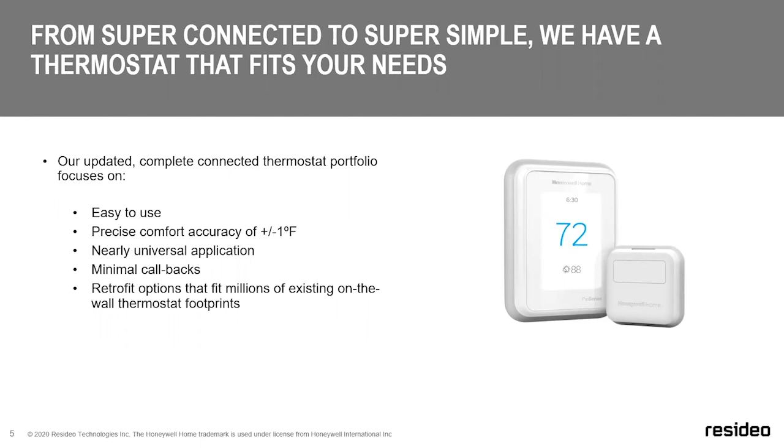We have a nearly universal application. We want to keep callbacks to a minimum, and also have the capability of upgrading millions of homes that already have a footprint out there and easily upgrade to a connected portfolio.

In order for you to truly understand what we're working at, there are two things you need to understand. It's the communication protocols, not only how the equipment communicates with itself and the different pieces put together, but also how the homeowner or customer interacts with their system outside of going directly to the thermostat face. And that's really done today in three different ways.

We have our proprietary RedLINK wireless technology, which I'll explain later. It's also done using Wi-Fi, which basically uses the existing internet signal throughout the house to open that protocol up and allow you to interact with your system without going directly to the thermostat. And the final way is through Z-Wave, now upgraded to Z-Wave Plus, which allows you to integrate other systems in the house together through a hub, and I'll go through it a little bit as we come up. So those are the three main ways.

So what is a communication protocol? Basically, it's two parts. From the equipment perspective, it's how the different items in the HVAC system talk to each other, whether it's the outdoor unit and the condenser to the air handler to the thermostat. That's done in a bunch of different ways, whether through wires or wireless communication. The takeaway is that the biggest difference is how the format and frequency is transmitted. So that's the first part. And here's a little breakdown of how that looks.

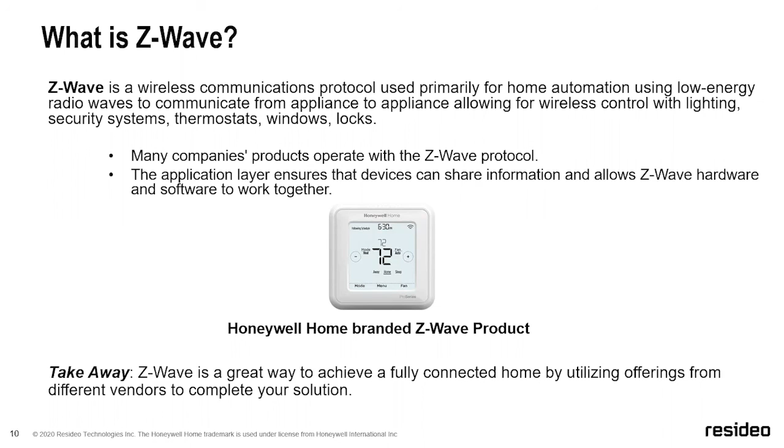Moving on, we're going to talk about Wi-Fi. Now here's where things get a little confusing from the most part that we see out there. Really what it is, the Wi-Fi uses the Wi-Fi signal within the house, which most homes have a Wi-Fi router these days.

It will communicate back to that. Then the apps translate the language so that the internet understands it, and then you can use your phone to make the temperature go up and down or control however you want to. It's a very inexpensive way to start automating a home where there's not much infrastructure needed other than that router, and then you can add other things in.

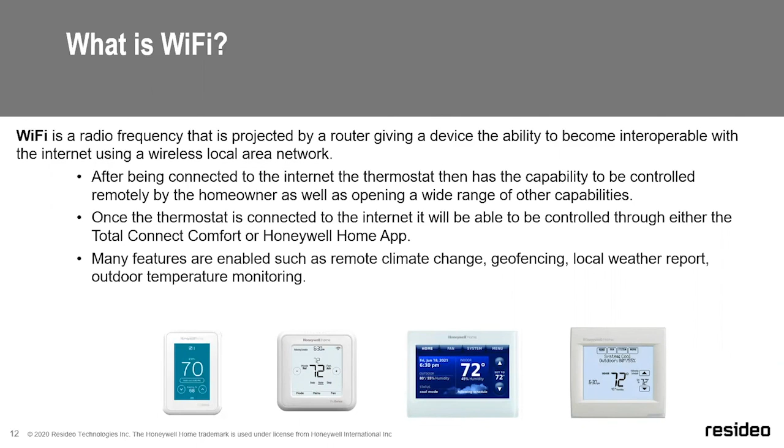What's really nice about the Honeywell Home app and the Total Connect Comfort is we set it up with an open protocol that allows us to work with whatever internet or home automation system that you choose. If today you have one type of phone, it doesn't matter that in 3 years you may decide to have a different brand or something else - we allow it to open and actually talk in there. It also allows you to do that in an inexpensive way. There's not a lot of invasive ways. Use your current system.

Another nice thing also is, before I start getting into the individual smart or Wi-Fi enabled thermostats that we have in our portfolio, is what's unique to Honeywell is we have what we call the K terminal on all of the thermostats that I'll talk about, and that allows us to provide power to the thermostats without using power stealing, which is a best practice, so to speak.

So if you go into a house that wants to upgrade to a Wi-Fi thermostat and you only have 4 wires in the wall, the C-wire adapter is a great option for all these thermostats to basically take your Y and G wire and split the signal across K, and that goes right into the back of the thermostat. The C-wire adapter, which is a THP9045A1098, is relatively inexpensive, and it's very fast. You do all the wiring down to the equipment, and you're set to go.

And why it's a best practice is because the way power stealing thermostats work is that they charge a battery in the thermostat when the system is not running. If you get into situations of long cold periods or long hot periods and the system runs more, the battery does not get properly charged, and then you may have problems with your customers down the road where they're hot or where the system has failed because the battery has gone dead.

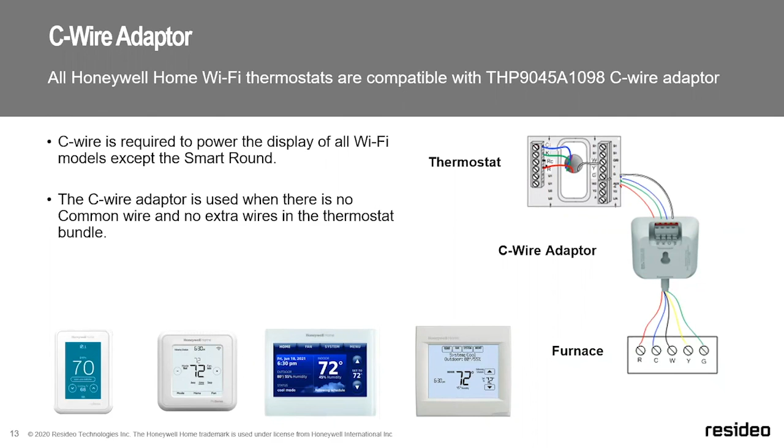So the reason why these thermostats need power is because that communication with a Wi-Fi signal is constant, and therefore there's a lot of communication back and forth. So it's constantly looking for it, and that does draw power.

So we started our portfolio here off with the T6 Pro Smart Series. We have 2 models. We have the TH6320WF2003, that allows you up to 3 heats, 2 cools. It's dual fuel enabled, has a ventilation control, and yet again it is a C-wire. It also comes with a 5-year warranty. And then we have the 6220, which is a 2-heat, 1-cool heat pump, or 2-heat, 2-cool conventional.

Really what we do is, the reason there's 2 thermostats in this space is that we've given you the opportunity at a price point that the rest of the market really doesn't support, at a lower price basically giving you the capability of adding Wi-Fi to a much more basic structure and being more cost effective rather than having to go with a super expensive type thermostat.

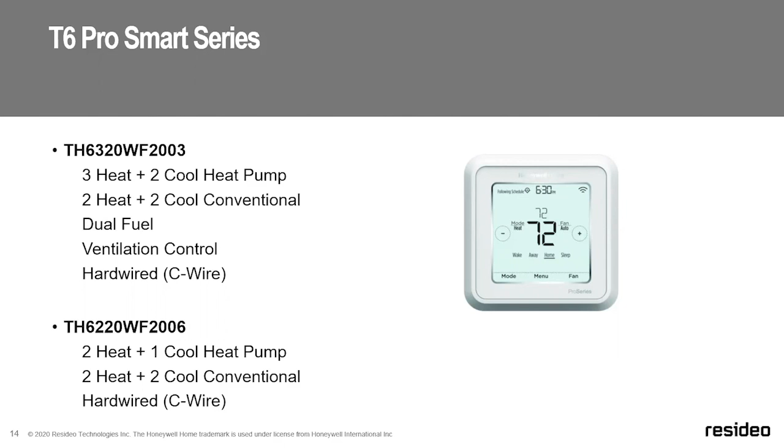This is really good for if you're a contractor that likes to use bundles in their sales process. This is a very easy way to give that customer that next level at a very price effective way, and they're full of plenty of features.

So what accessories does it come with? There's also ones that come in the box. In the box you get the J-Box adapter, the universal wall plate, all the things you need to do the job. Then there's some extra accessories listed on the screen - we have a larger decorative wall plate, as you can see on the top. You can use indoor sensors and outdoor sensors, and then also there's the C-wire adapter that we talked about earlier.

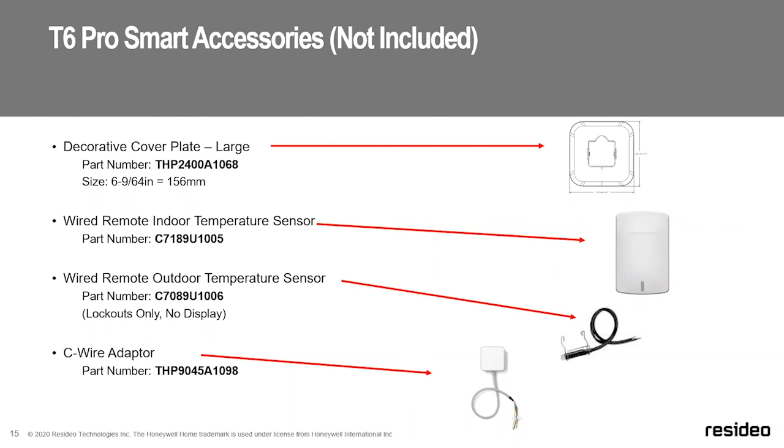Okay, just some other features I want to go over on the 6320. You have the ability to have a balance point for low outdoor temp. You can lock out auxiliary heat. There's a ventilation option for outdoor temperature. All these things you're going to need the outdoor sensor for.

Or the use of AccuWeather as internet weather in order to set those points, which is really convenient. And also, yet again, a lot of situations where you don't have that capability to run that outdoor wire, we can use the internet to provide that.

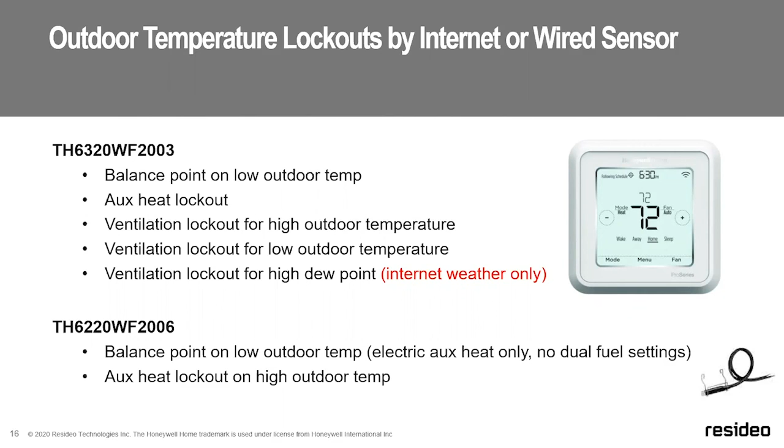The 6220, for where it is, does not do dual fuel, but does have electric auxiliary heat, and we can lock out on high temperature.

There are alerts and reminders. This is going to come up a couple times in our conversation today, but keep in mind that we have lots of alerts and customizable reminders throughout our thermostat portfolio. Here are some of the ones that the T6 has: clear the humidifier tank, replace pads, filters, ventilator core, all the different things you would need to do, and that's set up through the app and on the thermostat face itself.

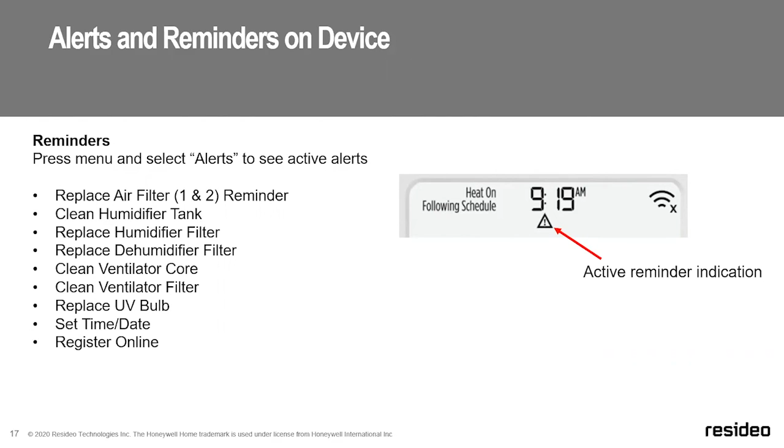They can set all those to it. It's really nice. Set up date and time, but if it's connected to Wi-Fi, you won't need to do all that. You can also register the thermostat directly from the wall.

The next of ours, and this is one of my favorite thermostats out there, is the VisionPRO 8000 Smart, the TH8321 WF1001. This is really like a workhorse thermostat in our portfolio, in the fact that it is both residential and light commercial control. You have a lot of flexibility here, 3 heats, 2 cools. It's dual fuel enabled, has a 5-year warranty, and also comes with a set of IAQ terminals.

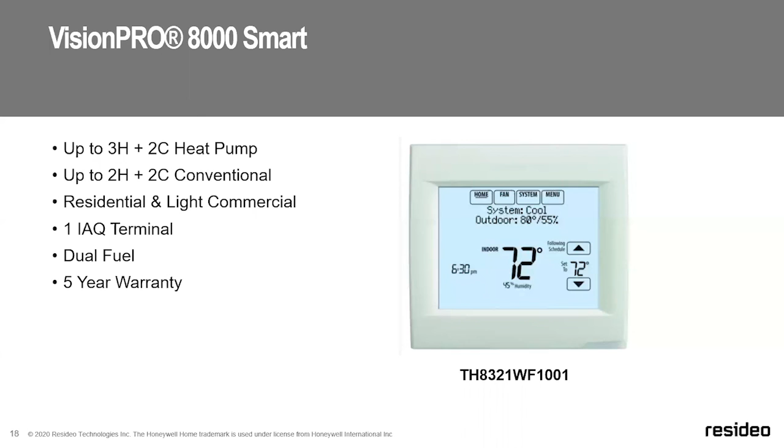And then we can take care of that there. In the light commercial size, it has the capability of handling economizers and others like that, and you can also set it up for occupied, unoccupied.

I just want to show you here, the special part is the sensor input, the S1s that are automatically in the back and the wiring. You can set those S1s to either be an indoor sensor, which is a C7189U. Just keep in mind that Ohm's law applies in this scenario on the wiring, so make sure you get that correct, where you just can't run them all in there. You can actually have up to 4 in this sense, and then they'll do an averaging.

You can also use the TR21A 20K averaging indoor sensors, which is also applicable here as well. And if you wanted to run for a dual fuel scenario, run the outdoor C7089U 1006. You can run that out there and have direct temperature set point for the outside.

What's really nice about the AccuWeather option for all of the thermostats I'm going to talk about today is, for the most part, the way it works is it finds the 2 closest municipal buildings to the location of the thermostat, and then runs the averages off of those. It's the same technology that's in your phone if you were to look up the weather today and find out what's going on where you are. Again, getting an outdoor sensor to the north side of the building and in the shade can be very complicated. This gives you another avenue.

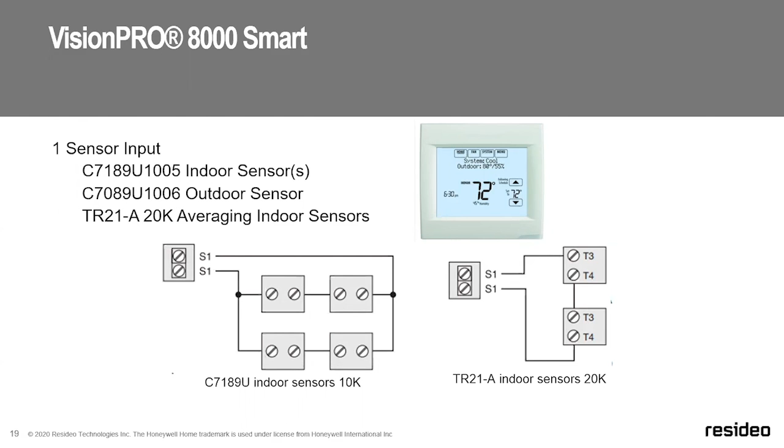You can set custom reminders on all different types here, and you can also put advertisements in as well, like saying, call us for a fall tune-up special, or something to that effect, for service reminders. This is also a really good thermostat in the fact that it has a lockout type setup.

You can do either a full lockout, where you can lock out the thermostat altogether, where no one has access to it other than the person that holds the code. Or you can do a semi-lockout, which is kind of like the morphine drip at the hospital - you can hit the button as many times as you want, but whoever has set it for the max number of degrees up and down, it'll do that.

From personal use, I've used this a lot in those types of situations, particularly a school system that had a lot of mobile trailers. This allowed them to do that and actually keep their energy costs under control. That's a really nice feature. You also don't need that sign out there that says please don't touch our thermostat, which is also nice, and not needing the plastic cover. We do have the plastic cover available for a lockbox, but know that you can lock the screen and not have that.

Looking here, automatic software updates through the Wi-Fi signal.

So if we make a change to how we want it to operate, or there's a change to the ASHRAE code, it'll automatically upgrade itself and save you time and money. Just keep in mind on this one, we got to have 24 volts, so we can use that C-wire adapter here as well. And there are no batteries on this one, so we got to keep it constantly powered. We'll talk about the RedLINK version of this later, but just keep that in mind.

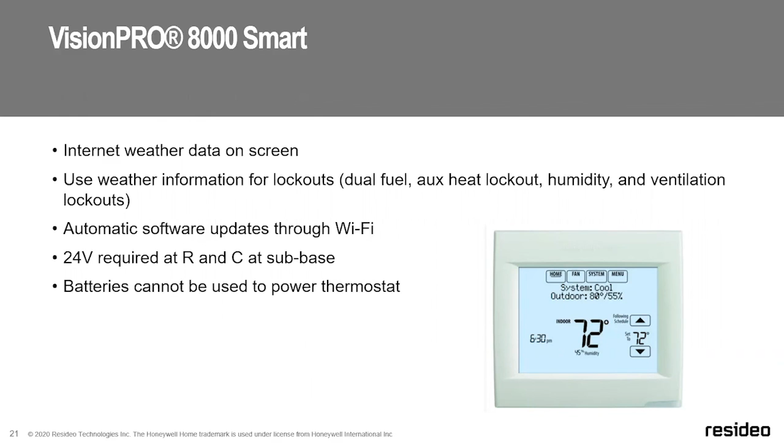Another popular option here is the Wi-Fi 9000 Smart. It's a 3 heat 2 cool, 7-day programmable, and has customizable color with 14 different color types. Really nice to match what's going on the wall. It looks really, really sharp.

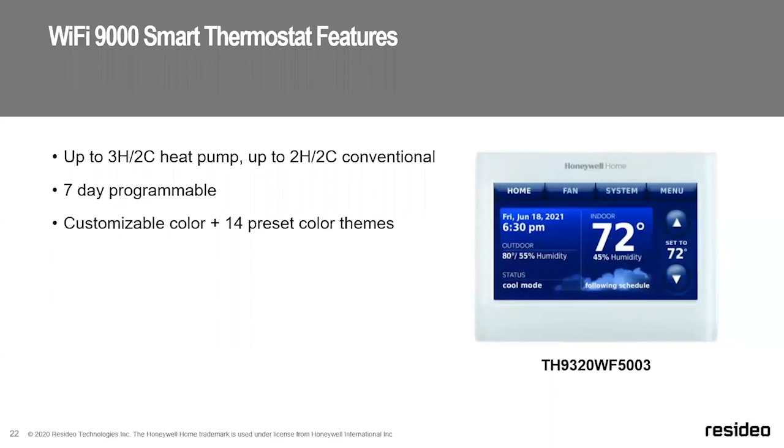There's another part to this thermostat that is really nice. This is something I would like you to reach out to your Resideo CDSs or RDRs about, but it has remote access through Androids and apps and all that stuff you can see there for scheduling and similar features. We also have a number of energy partners that use this 9000 for their logic as far as getting the best operation for energy savings.

So you have that multiple location customer, like sports bars or similar, where there are multiple locations and they can use the energy savings. We have a number of partners that can help us do that. It's also internet synchronized clock and all that data. It's pretty much a set it and forget it type thermostat, and it looks very sharp on the wall.

We're going to move into our communication protocol, which is the RedLink wireless technology or protocol, and we're going to roll through the thermostats that work on this.

It's important to know that every thermostat we just talked about from the smart perspective or Wi-Fi requires wires to communicate within the HVAC equipment. So you need to have running wires leaving the thermostat, going down to the air handler, out to the outdoor unit or rooftop or whatever else you've got going on there. You need wires to run to all the sensors, and that's all great when you're building new or have the wires in the wall.

But we also know that as systems get upgraded and the movement to heat pumps, which has become super popular, and configurations change, the cost of running wires can be excessive. But the smart ones are very good for using basically just basic Wi-Fi.

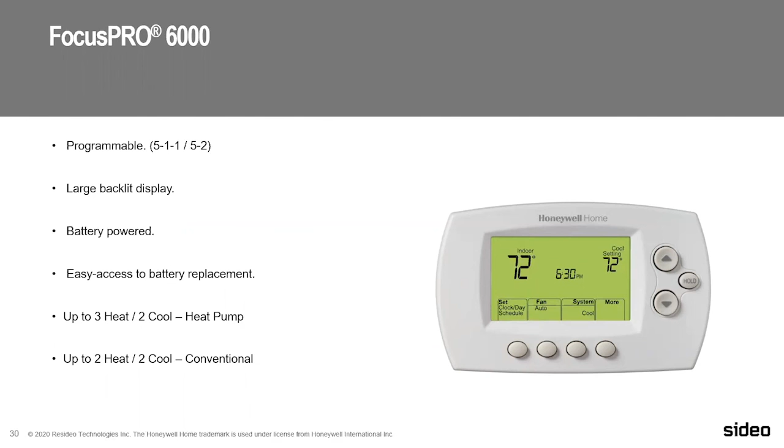Then we also have the Focus Pro 6000. That's programmable, a 511 or 52 large display, just like you saw before, battery powered. It's easy to do, 3 heat 2 cool, and 2 heat 2 cool conventional. We have multiple kits for this as well. In the case of dual fuel, you have access to the outdoor sensor. We have multiple kits that include both the outdoor sensor and the gateway, just the gateway, or just the kit altogether, so there's one component to that and you're done.

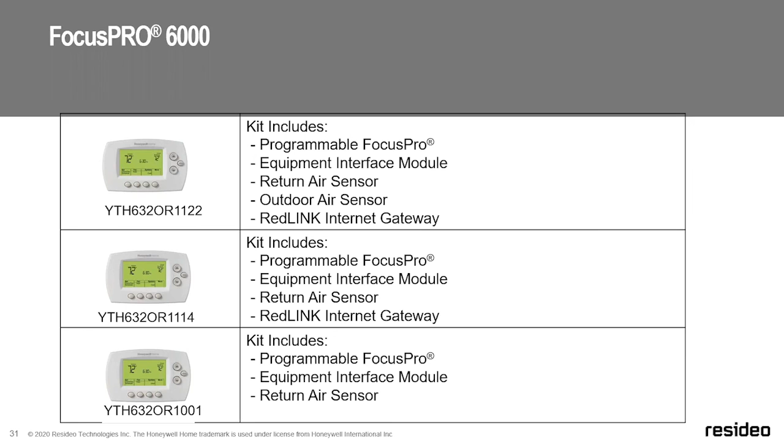All right, back to the VisionPRO 8000 with RedLink. The part number on that is a TH8321R1001. It's important to note in the nomenclature that if there's an R in the middle of the part number, that means it's RedLink and then it is compatible.

Don't confuse it with the 8000 Smart, which looks identical to it. A lot of the capabilities are the same. Just know that with that one you need to fully wire the system. In this case, you will not need to.

We have multiple variances of it. The 8321 has an indoor air quality component to it, and then you can also choose it in 8320. The 0 in the 8320 means there is no IAQ control. And then we also have a simple 1 heat, 1 cool model, for real basic stuff when you just need that and batteries.

What's really cool about this thermostat is if you add the THM5421R equipment interface module, it explodes in capability, both on the commercial side and residential side, giving you up to 4 heats. You can actually go to 4 heats, 4 cools with this scenario, which you may not need every day, but it's really nice that you're able to do that.

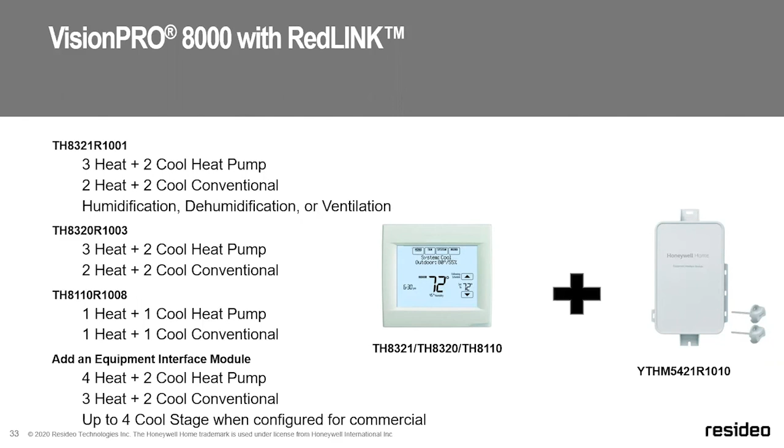It's easy to set up. It's all in plain English when you're doing a setup, so a contractor or whoever's doing the work can work through it. You won't need that little install manual because everything's explained there. If you need help, what's really nice is there's a help button—you just hit that and it explains everything on the page that you would need to do.

It also has the capability of being upgraded, or if you've got a large project with multiple 8000s, you can put the information needed for setup on one MicroSD card and then upload all of them. So say you're doing a 20-thermostat job, you can set it up once and just roll through. It also allows you to put in your dealer information, and it just makes setup easy and reduces setup errors.

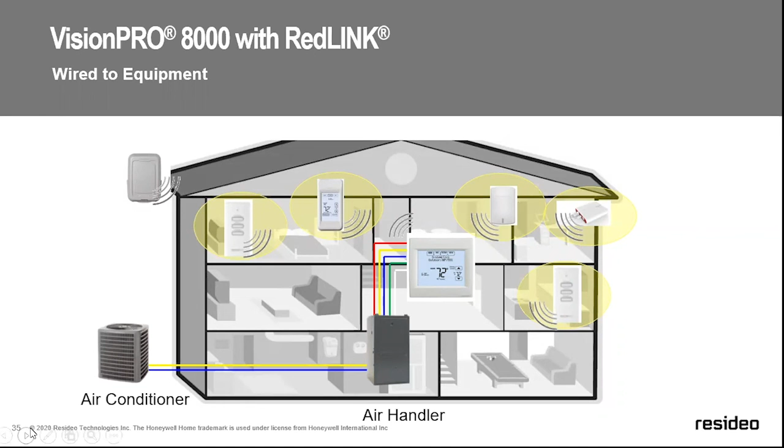Know that in this scenario you can use up to 5 of those sensors and do averaging on humidity and temperature. If you remove the thermostat face, you can actually have a 6th. A really good situation for that is, say someone has an office—you can locate that sensor in an office and take care of the space out there that they're looking for without giving access to the thermostat.

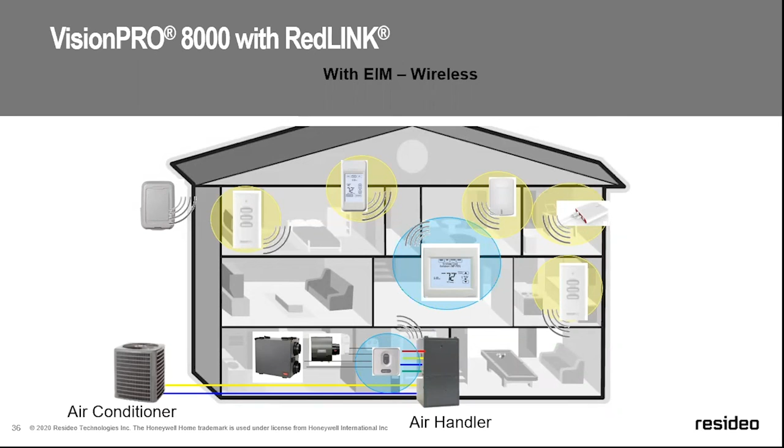And then also know that in case we can do this wirelessly, if you want to relocate a thermostat and you have the EIM, which gives you the over the 6000 and 5000 we talked about earlier, gives you the capability of controlling a number of IAQ devices, whether they're humidifiers, dehumidifiers, or ventilation. And then we also have a newer one called the ERM. It's not pictured here, but it's good to know that if you're upgrading outside from an AC unit to a heat pump, which is very common in my part of the world, we have an equipment remote module which allows you to do that, supplies power out there.

So really nice setup. The 8000 has a lot of capability.

Okay, and then here we go into zoning. All of our RedLink thermostats we're going to talk about today can work with our zoning system. There's another class that we have out there, take a look at it online and also attend a later webinar on it. It allows you to basically use zoning the same way using RedLink, so you can cut down on all that wiring.

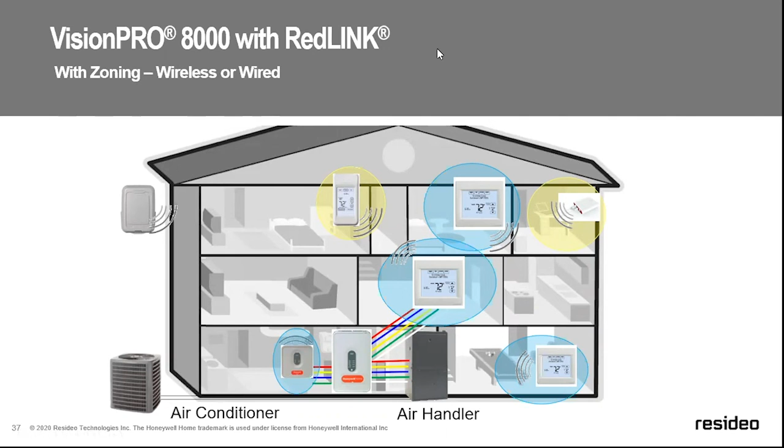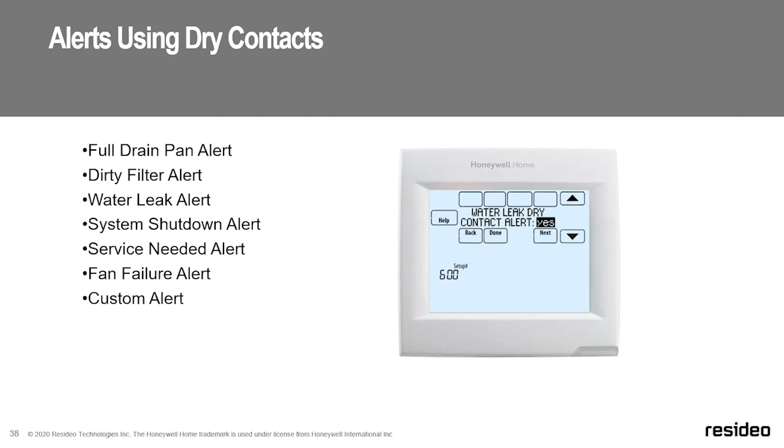I just want to go real quick over the universal outputs. When you're just using the 8000 all by itself, you have one, and then you have to choose between what you want to wire to it, whether it's humidification, ventilation, or a stage 3 cooling, and then backup for radiant heat.

Now if you add the EIM, equipment interface module that we were talking about earlier, you can have everything you want. You can add humidification, dehumidification, and ventilation, the additional cooling stages, and geothermal heat. So just keep in mind, figure out what your system requirements are, and then you can upgrade very easily here.

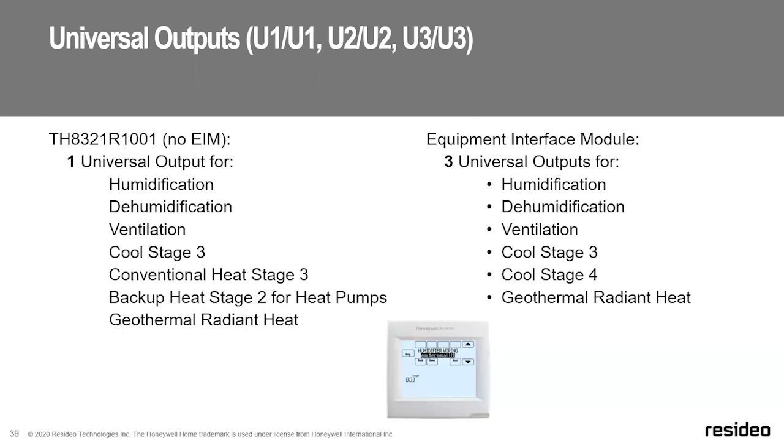Okay, just a little quick information on the MicroSD card, how you do it. Basically you can set everything up from the computer. If you go to the Forward Thinking site there, you can actually set up and go through the screens, do all the setup, and then plug in the MicroSD card and transfer it over. You can also add your information as well.

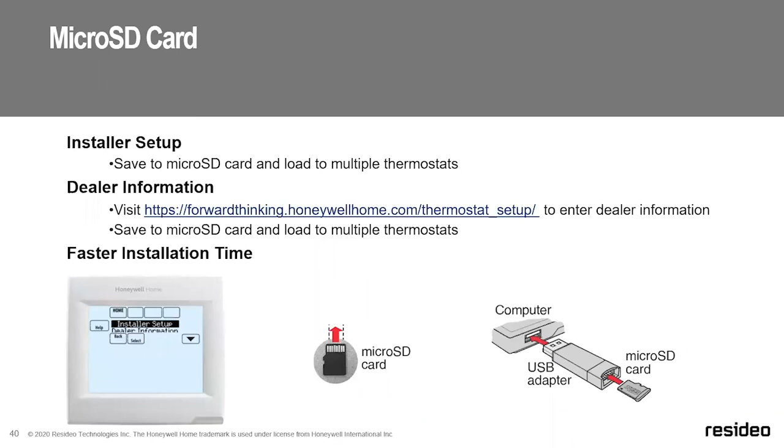All right, more custom reminders, the same ones as before in the Smart, in the 8000 Smart.

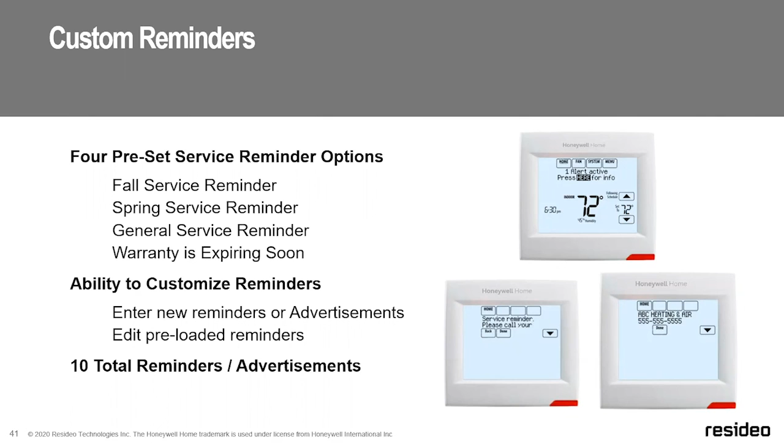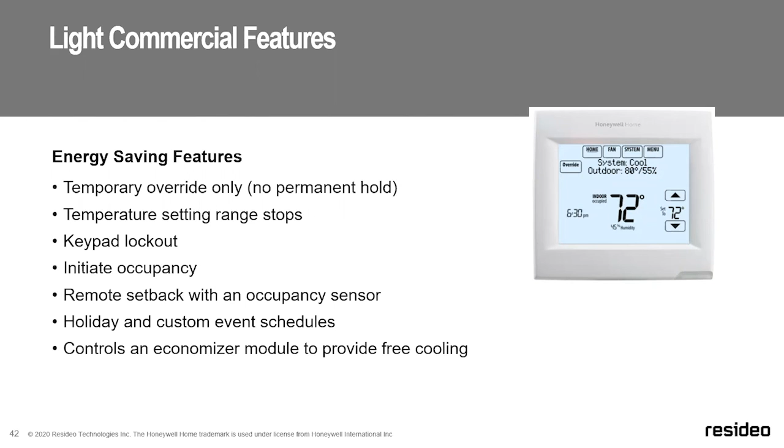Moving on, this is our newest thermostat in the portfolio, the T10 Pro with Smart RedLink thermostat. This is kind of a hybrid, it's our first one that we would consider to be dual band. And what do I mean by that? This is a case where it can do Wi-Fi, adding Wi-Fi to the system without needing a RIB. The technology is getting to the point where we can shrink it down and not need the extra accessory. But this has a lot of extra features that I'll get to in a minute, that really make this thermostat a problem solver for a lot of our customers out there.

So it's the THX321WFS2001W. Comes in the kit is the thermostat, one sensor, which I'll explain how that sensor works, the UWP that you got used to with the T series, and a J-Box adapter. It's available without the sensor if you want to a la carte that to your customers. And then the sensors, the RedLink 3.0 indoor sensors, which have a lot more capability over our older 2.0, come in packs of 2.

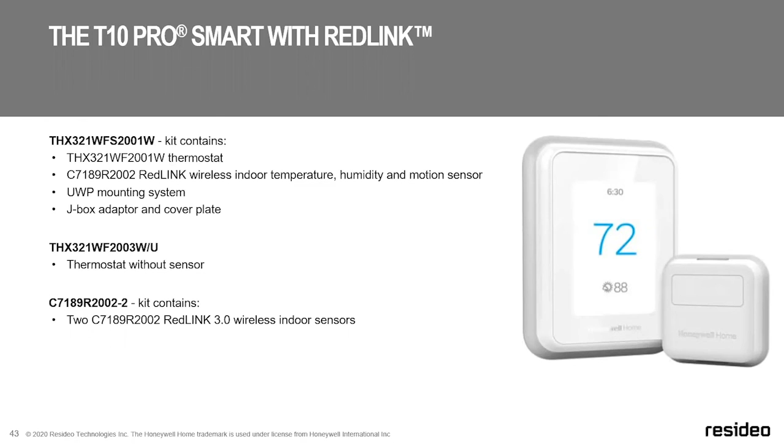So here's its capability. It's 3 heat, 2 cool heat pump, 2 heat, 2 cool conventional. Has dual fuel capability, auxiliary heat lockout, and then you have one indoor air quality terminal that you can use for humidification, dehumidification, or ventilation. And then here's an extra thing, little bonus to it. If you choose humidification or ventilation as one of your options, we give you a half option, as I like to call it, which allows you to dehumidify using the system. So the algorithm is in there to do that, where we can overcool, and I'll explain it a little bit here, but it gives you a lot more flexibility at a very, very competitive price.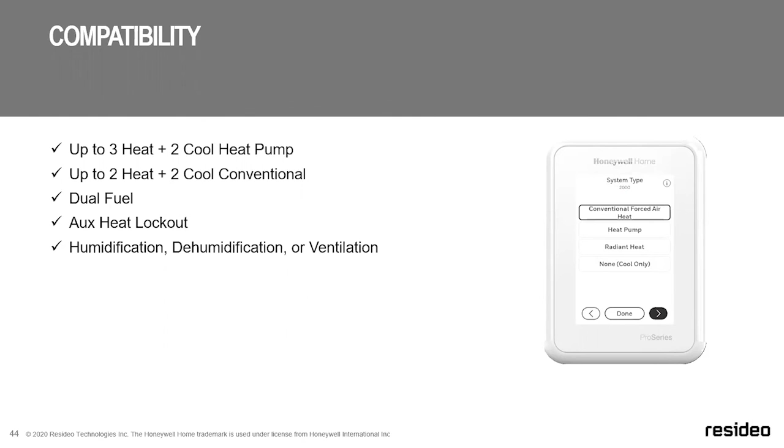This one does need to be wired, so we talked about it's kind of like a hybrid between RedLink and Smart, in the fact that you do need to run the wires down to the equipment. It's just that the RedLink 3.0 sensors are the wireless portion, but it has the K terminal as before, and you can use the C-wire adapter.

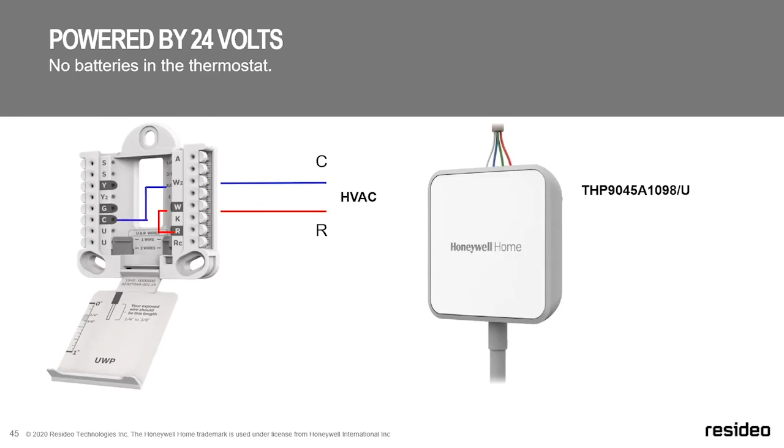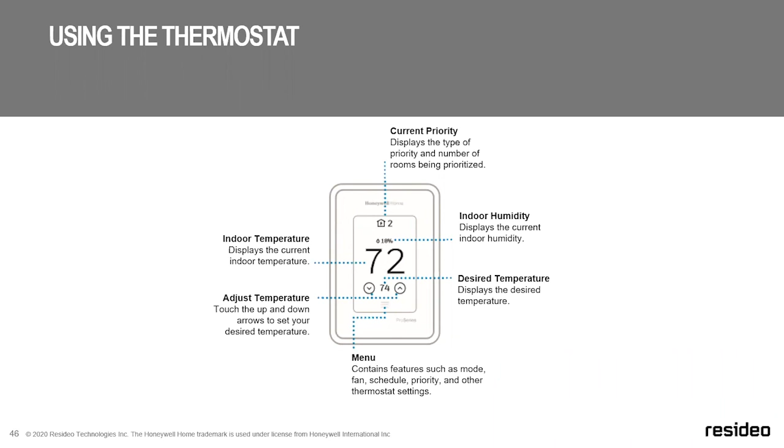Okay, using the thermostat is about as easy as possible. It is set up to be like your smartphone. It looks and holds the same way, and the way you interact with it is the same. And there's a lot of information up there that the customer can take a look at, and we'll look at some screenshots here in a moment. But you see a desired temperature, everything here. And when you look at this screen, it's going to look exactly as it does on that app.

Setup is simple as can be. Walk through the steps. It's all written there. If there's ever a part where you do not understand the question, you can just hit the little i icon up there in the top right corner, and bang, everything you need to know is right there to answer your question. What's also nice is it flows back and forth as you need to do stuff, so that you don't have to start with ISU 1 and work all the way through if something didn't go right, or you found out you needed to go back. You can go directly to that.

So it's very interactive. It also gives you the capability where it locks out questions once you answer them. So your setup time is reduced dramatically because, okay, you said it's going to be a heat pump. You're not going to be bothering with any of the other questions that do not apply.

Okay, now here's the best part of this: the RedLink 3.0 sensors. The other RedLink devices we're talking about are 2.0. As we're upgrading our system, 3.0 is the newest version, the latest and greatest of RedLink, and we're going to be adding accessories moving forward. So this gives you capability, but these sensors are really nice in the fact that they take temperature, humidity, and motion or occupancy, and then we can average temperatures throughout or place priority.

This is really where we get into the fact that we, for years, have always reacted to our houses instead of our houses reacting to us. This gives you that capability now and actually helps you and your customers, particularly the ones that have always had a room that they kind of live with, whether it's too hot or too cold, and you didn't really have another way, and zoning is just not feasible in that scenario. That's a very invasive process. This is kind of like having a thermostat in your pocket as you walk around. It's pretty nice.

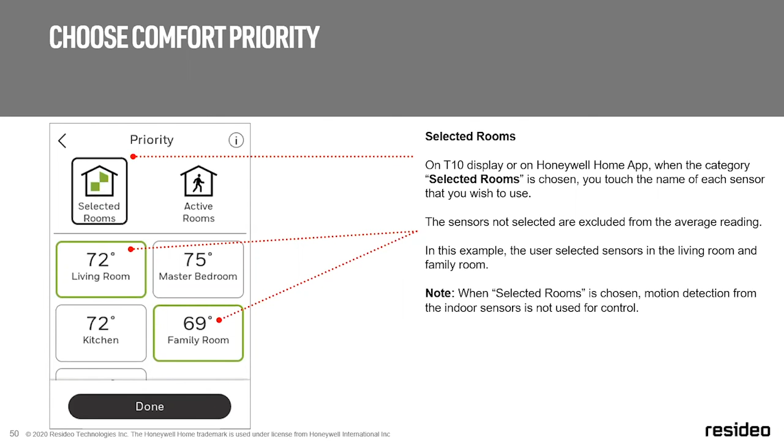What you'll see is when you first put this thermostat in, you're going to see variances in temperatures throughout the house. And it's amazing to watch over 30 days as the thermostat learns, and as it does this averaging, how much tighter those get throughout the house. And the next way is what we call active rooms or priority, using that motion sensor that we talked about. Did you see that there's a little green guy there on the screen?

Basically how it works is when a room is occupied longer than 5 minutes by someone who's more than 80 pounds, that's an important distinction. If you got a little one running around below 80 pounds, you're not messing with the system at all. Or if you have a large animal or dog going around, it's all based on that.

If you occupy for longer than 5 minutes, it becomes an active room and stays active until someone has left it for longer than 5 minutes. Pretty nifty. Like I said, you interact, but it won't cause other problems because you may be bouncing in or out of the room, or you had a little one that's running through every room all the time.

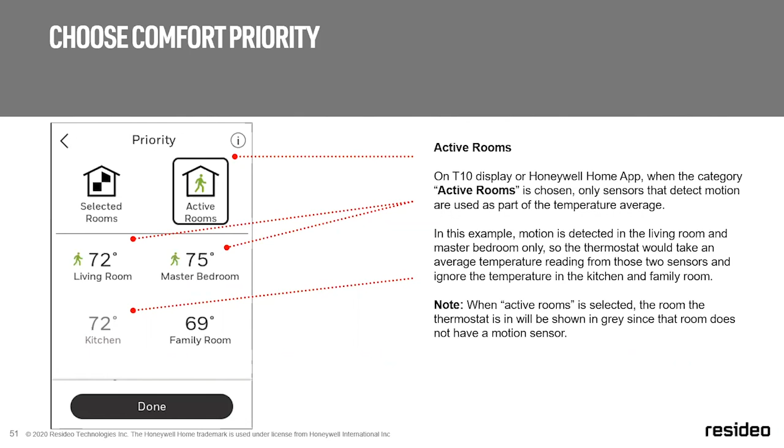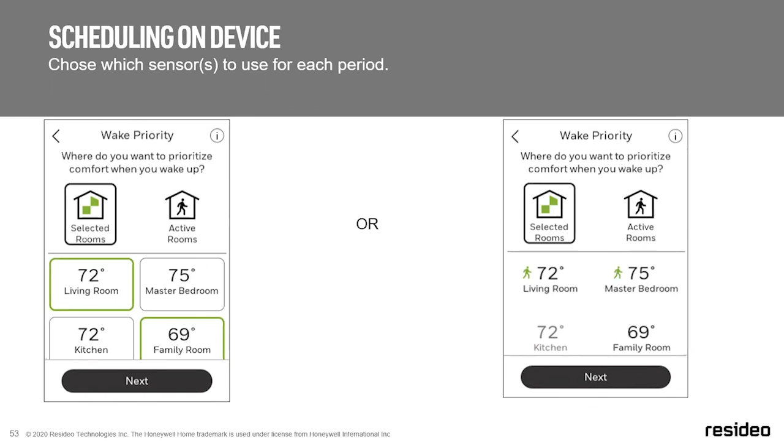Scheduling on this device is very simple. It's based on however the customer wants to interact with their thermostat, whether it is using the geofencing option or time-based or manually doing it. There's plenty there. Wake priority, you can set all that kind of stuff as well. If you want to wake at a different temperature than when you go to bed, you have all that flexibility.

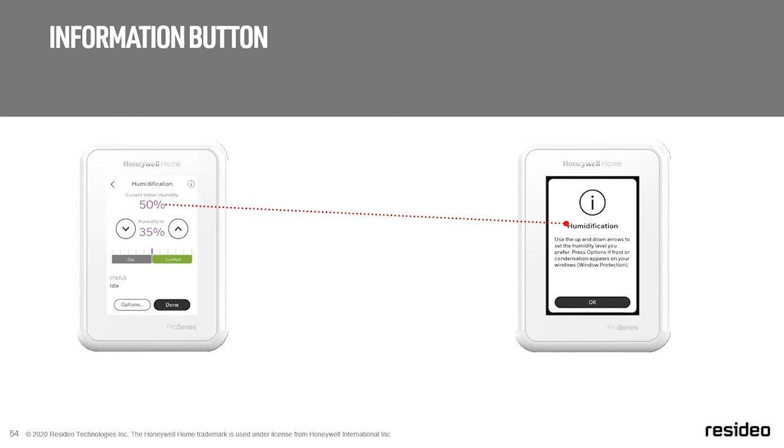The information button, I was talking about that earlier. If anyone is stuck at any point, hit that button and it gives you the full explanation of what it is. Okay. How does it look? So here's some things, just to give you an idea.

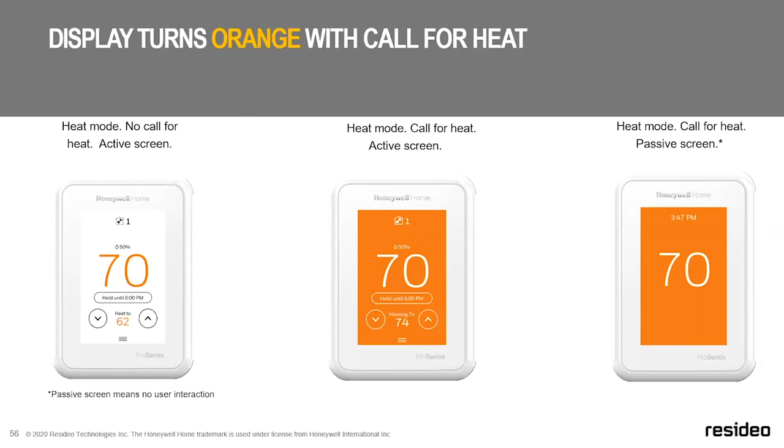And when it's idle, just the numbers are color coded. And then if it's active, the full screen changes color. Same for heat, but it'll be orange in that aspect. Okay, customize an interactive display.

All right, and again, you can set this thermostat to be any brightness that you want, and depending on the room that it's in, you can change the backlight as much as you want, and also set it time-based, where you say, all right, after 9 o'clock, it's in my bedroom, I don't want to see that light. It'll shut off until somebody wakes it up by actively touching it.

And this is a really nice feature here. We have a private label program that I'll talk about in a little bit, but here you can put your dealer information in, type it in, or put in your Pro Perks number. And when you put in your Pro Perks, it'll automatically populate. And this way, when the alert comes up, it'll say, call Dan's Plumber, and here's the information to do that. It's really great for repeat business.

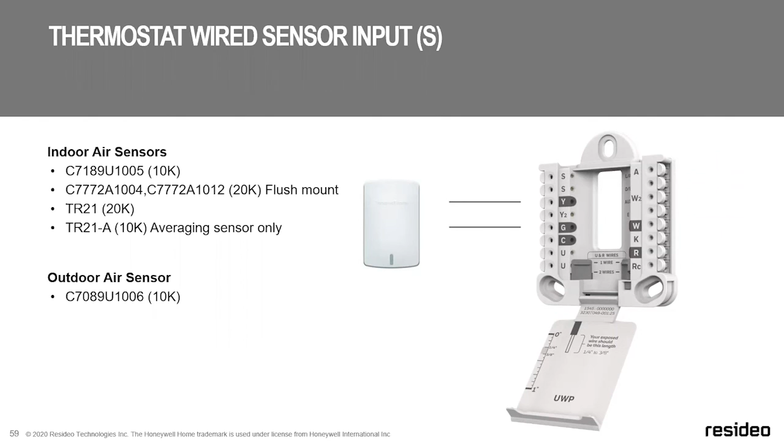The thermostat has a wired sensor input. We just talked about the indoor sensors, which, by the way, you can add up to 20 of them, and you have a range of 200 feet, which is pretty nice. But you can run the wired sensors if you want. Just keep in mind, if you do that, Ohm's law will apply. Really, this is a good spot for the outdoor sensor, depending on where you are in the country, if you want to run an outdoor sensor as opposed to using AccuWeather. And again, there's the options there.

Okay, humidifier control. This is one that's really dear to my heart, believe it or not. In the past, when you're setting up frost protection or your humidification or your indoor air quality things, it was all kind of general. Here it's very specific, and there's different ways to operate different types of humidifiers, whether bypass or evaporative or steam type. They'll run a little bit differently to get the optimal out of it.

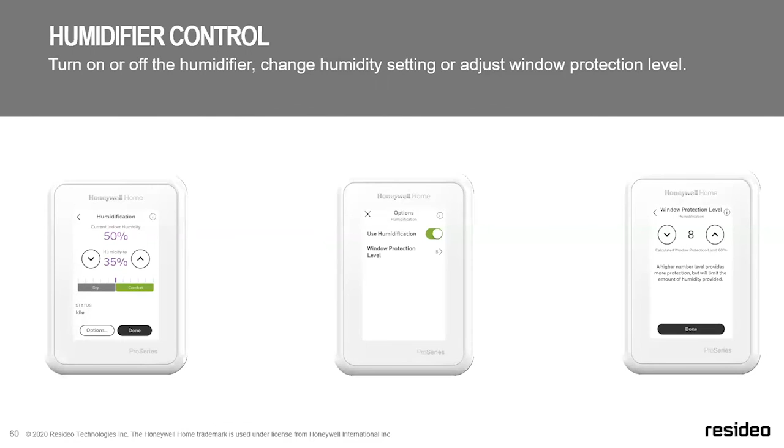Here's very simple. You just tell it what type it is, and if you want to do window protection, the old way was you went to the book, you look for the tightness of the house, and look for your ideal percentage, and then that would generate a number, and you'd have to plug it in. Here it's very simple. Just slide the percentage up and down, and it automatically calculates. And that'll eliminate that frost, or condensation you see on the windows.

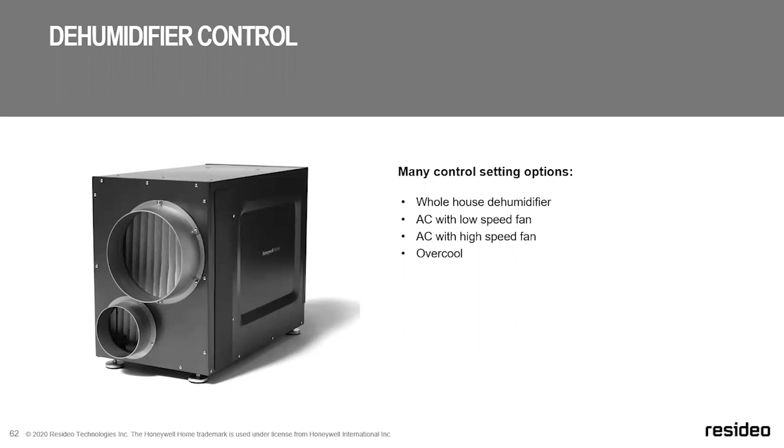You have dehumidification control as well, where you can wire directly to a whole home dehumidifier. But also know that we have a pretty nice feature where, if that's not applicable, we can do the overcool and run the air conditioner a little bit longer in order to bring that humidity level down.

And also ventilation control. You can set it to ASHRAE. The current one is 62.2. And then if you want to move to the different one, I know there's a newer one out there, which is done based on percentage of time. You can calculate that yourself and put that in. And then you can turn the system fan on with ventilation, and it'll work there. We can also do lockouts.

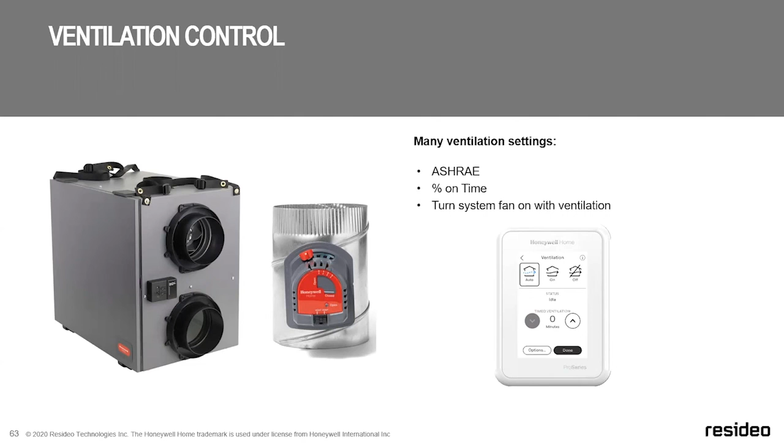All right. Wi-Fi remote access. This is in general for all of our thermostats. All of our thermostats that are Wi-Fi work on the 2.4 gigahertz signal. The T10 will work on both 2.4 and 5. A common situation that comes up is you put a Wi-Fi thermostat in there and the house only has 5G. It's very simple: either go to the router or contact the internet provider and split the signal. That works pretty well.

T10 will do both. Just so you know the differences, almost everything works on 2.4. You have better range with 2.4, but 5 has a greater bandwidth. Thermostats traditionally don't need a ton of bandwidth, but it's based on how the house is set up. And the T10 does not require a gateway. The gateway doesn't care which Wi-Fi, because you plug it in using an Ethernet cord into the back of the router or into the Ethernet system, depending whether you're in a light commercial application or at home in a residence.

All right, simple Wi-Fi, easy registration process, very easy to do. Like I said, it walks you through. Also, keep in mind that we don't expect you to be IT people. Using our app, you have the contractor mode, which allows you to do the customer handoff, and also know that we have tech support to help customers with Wi-Fi issues, like not knowing the password or all the different things that come with it. For you and I, we want to make sure that all the equipment is running and that the home is comfortable, and then the Wi-Fi, hand it over to the IT professionals.

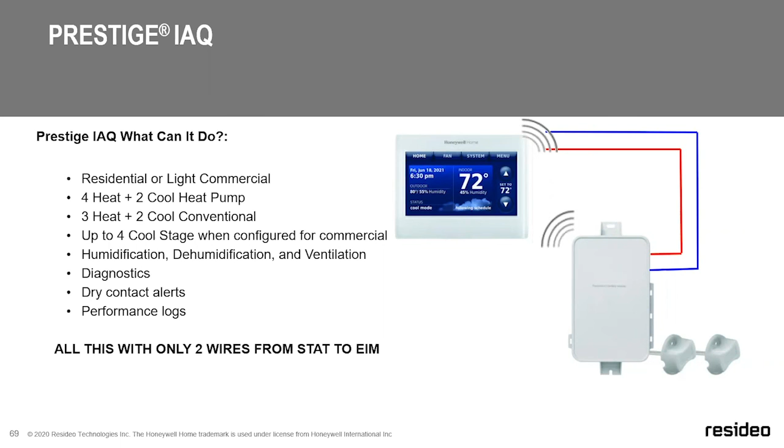And this only requires 2 wires. Those 2 wires are purely for power to the face of the thermostat. So you can pull the power from a transformer or directly from the equipment. In a lot of situations, particularly when you're putting in new equipment or retrofitting, there's almost always 2 wires in the wall, which gives you that fantastic capability.

All right, here's some of the kits. It comes in kit form because you do need the 2 parts. You can also buy the faces, but that's for zoning, which will come up in another webinar. The 5085 kit, the YTHX 9421R 5085, is your most basic one, coming with the thermostat base and the EIM plus 2 duct sensors. The duct sensors are used for calculating delta T and diagnostics, so it's always good to install those.

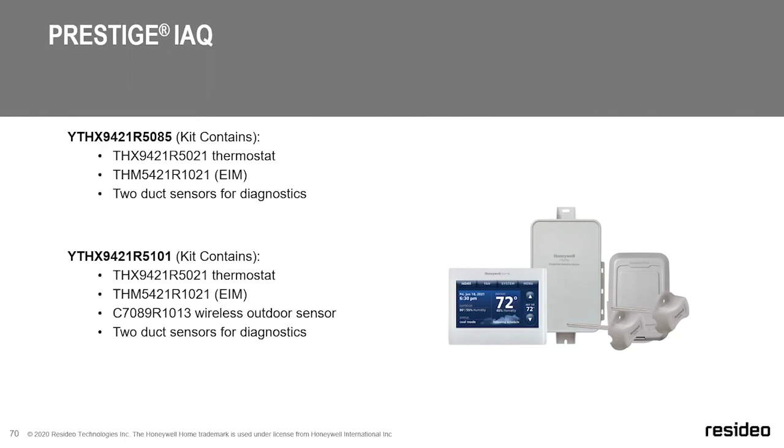The 5101 is also very popular because you get the outdoor sensor. It will actually show the outdoor temperature right on the face of the thermostat, in addition to being used for background calculations like dual fuel scenarios. It also comes with the duct sensors for diagnostics. This thermostat, very similar to the 9000, has a plethora of colors you can change it to, to specifically match your wallpaper or wall paint.

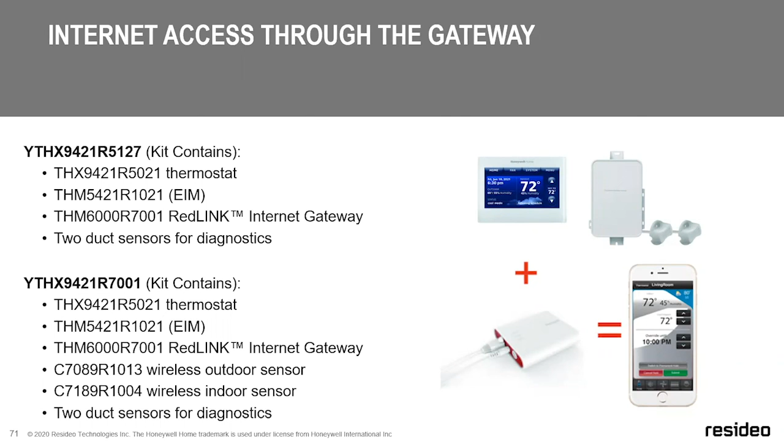I've had jobs with 42 thermostats, and we've built it out accordingly. Keep in mind you don't need an outdoor sensor for every thermostat if you have multiple units. One outdoor sensor is good for up to 16 Prestige systems, so 16 thermostats it'll handle. A gateway is good for 4, so you won't need a gateway for every single one, just every 4 will require a gateway.

Color themes, like we talked about, you can match them up pretty nicely. It's a very nice feature. One thing to know: in order to keep the information from burning onto the screen, at 2 o'clock in the morning the thermostat will power down, say Honeywell Home, and then power back up. That's not a problem, it's just good to know it's doing that so you don't get burn-in on the arrows, the time, or other elements you see on a lot of competitor LED type thermostat faces.

All right, you have Delta T alerts like we talked about earlier. You can also upload your logo, and then when there's a system alert of some sort, your information will populate.

It's really a nice feature. That's truly the time homeowners want to see your information, is when something's wrong. They tend to look things up, and if you're already there and they can see you and make the call, you'll get the call.

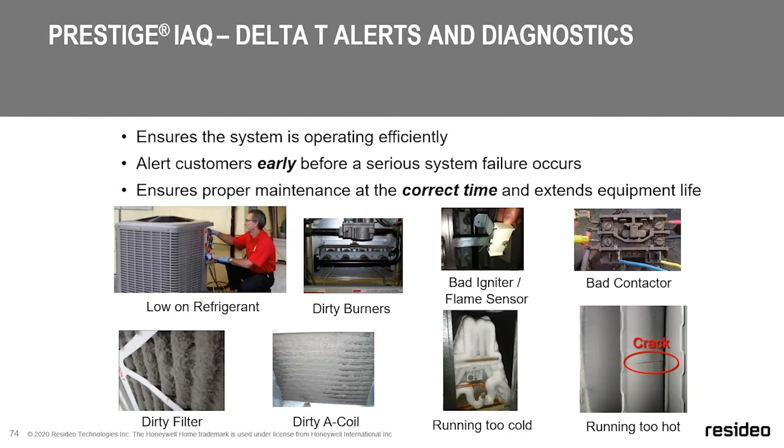Diagnostic, we can take a look at lots of different things: diagnosing low on refrigerant, dirty burners, running too cold. A lot of that information is now available to you, and you can do a lot of diagnostics and save yourself time and labor.

Same again here, we have the USB stick upload yet again, gives you that capability. On this one, you can actually put your logo in, it looks pretty nice, and then do any kind of updates that you want.

Yet again, same as before with the S terminals. Just know that you have 4 of them, and you can choose them however you need to. In the commercial mode, you use them also for those additional heats and additional cools. As you set them up, you go into the screens. These are just some screenshots of how easy it is, showing the setup of the Prestige thermostat.

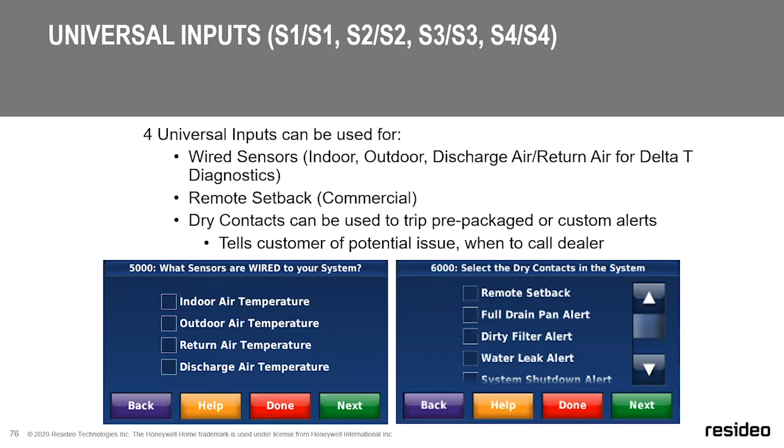There's also some nice things with the dry contacts. One feature I really like is set in the algorithm. Say you have a wet switch set up on a pan under a humidifier. In this case, if that alarm goes off, the Prestige will shut the humidifier off and keep the system running instead of shutting the whole system down. That's a pretty nice feature.

There's countless others. If you want to learn more about the Prestige thermostat than what we're covering today, please reach out to your local Resideo, Honeywell Home salesperson. They'll be able to help you through this, and there's a lot we can do. There's a lot of capability.

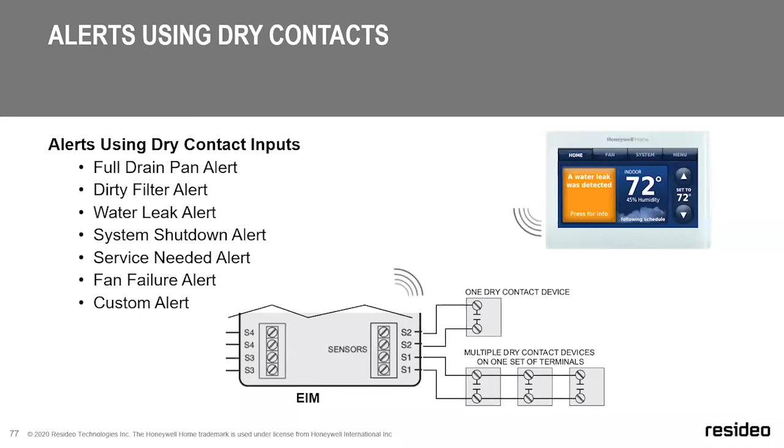And yet again, more universal use for the humidifiers, dehumidifiers, and cooling stages.

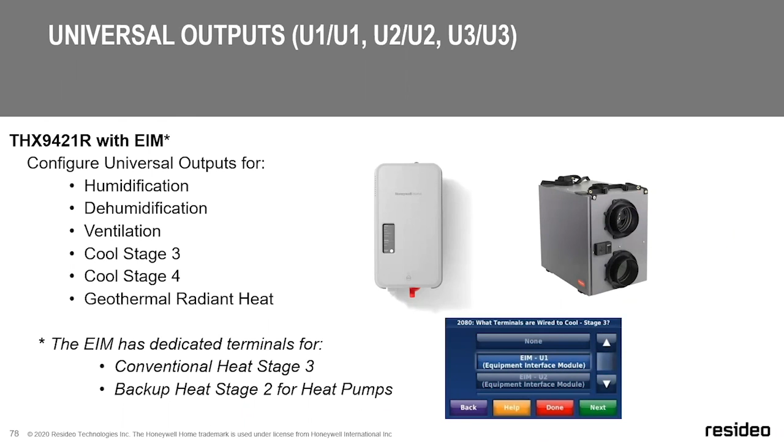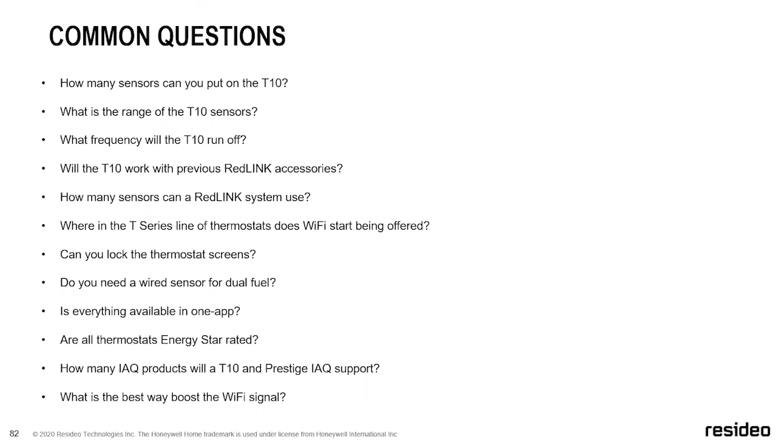All right, any other questions before we sign off? Give you all a few seconds. And then also, John, I wanted to ask you about the date code on how to lock the thermostats.

So the date code works in a number of different ways. Traditionally, anything we don't want the homeowner getting involved in, which is basically the setup and the professional work, can be locked. Depending on the thermostat, if it's locked and you need to get in, you put in the date code, which is the 4-digit number on the back plate, the red plate on the back, and that unlocks it. In the case of a T series, 1234 unlocks it. For the T6 Wi-Fi, you take 1234 plus the date code and add those two numbers together, and the answer will unlock it. That's really useful when someone locks a thermostat and you don't know the password. For Prestige and 8000 series, it's the same concept, knowing the date code.

Yeah, so the T6 Wi-Fi, we get that a lot. It's 1234 plus the date code. A lot of people try to put in 1234 and then the date code separately, but there's only a spot for 4 numbers, so keep in mind you add those two numbers together.